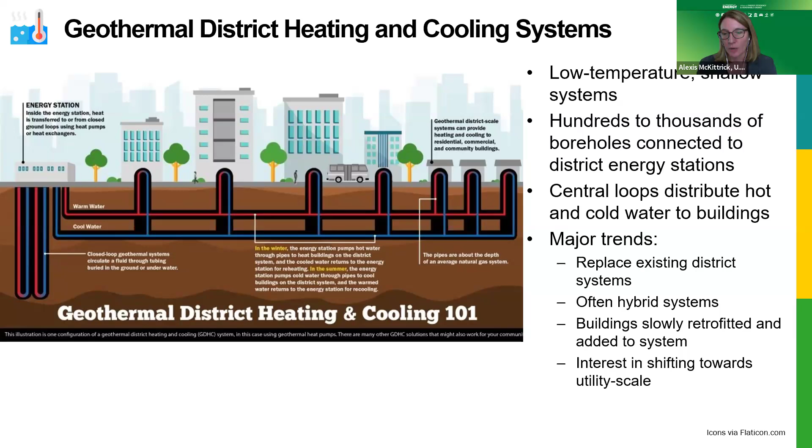Also, the previous graphic I showed was one loop that provided both heating and cooling. This system is what's called a 4G system, where essentially you have separate loops that are networked for both heating and cooling - basically a hot loop and a cold loop. That is, again, just another configuration of the way these can be made to work for whatever your situation is. I also wanted to mention quickly that there are a number of systems in the US that use a technology like this for heating only.

It's called direct use geothermal. It's usually less geothermal heat pump based and more about drilling a bit deeper and bringing really hot fluid to the surface, using heat exchange for heating. Those systems have been around for a long time.

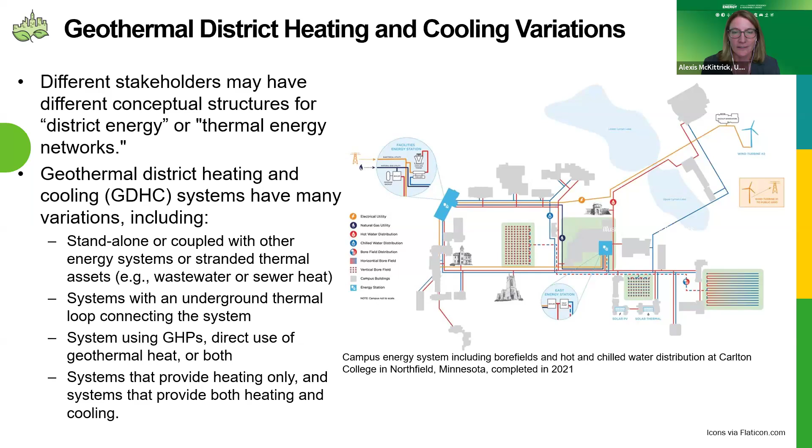One of the best examples, most commonly referenced, is the 90 building system in Boise, Idaho. If you're interested in that heating-only application, feel free to reach out to me or look up that Boise system, but I am going to concentrate on the heating and cooling space today. Next slide, please.

We would like to think at the Department of Energy that we are helping move this space forward. One of the big ways we're doing that is with our community geothermal portfolio. We had the opportunity to run a funding opportunity several years ago that served several different purposes.

We saw this emergence of community scale, district scale geothermal systems that were networked in universities. We hadn't seen as many of them move into communities, and we wanted to show through a set of innovative projects that these could work in a lot of different places in the US - in urban and suburban environments, rural and remote environments, different geologies and geographies across the US.

And that they could be used to reduce energy burden, to reduce environmental burden for communities, and really not only create a decarbonization solution for community scale heating and cooling, but also help remove burden from communities that have historically, unfortunately, disproportionately received that burden. So we are very proud of this set of projects.

Again, it's 11 different communities across 10 states, and you can see from the pins in the map kind of where those fall. They're listed here on the right.

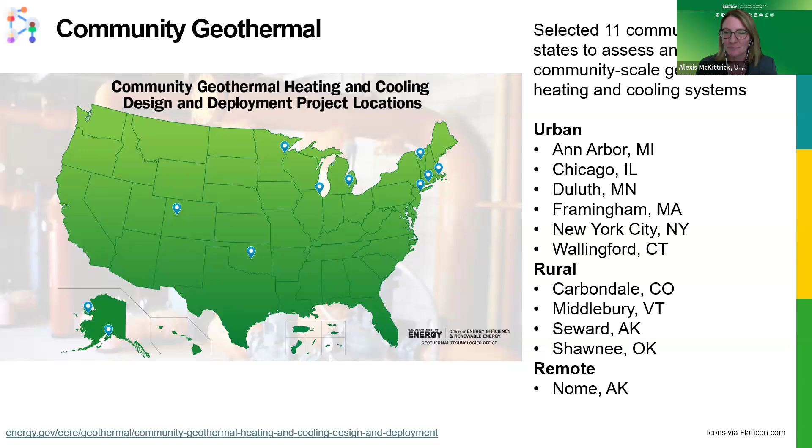I wanted to make sure to spend a couple minutes talking about some of the analytical resources we have for folks. One really important analysis that came out last December is our geothermal heat pump impacts analysis, or GHP impacts analysis. This was run out of our data modeling and analysis team at DOE's GTO, and was conducted by Oak Ridge National Lab and the National Renewable Energy Laboratory, or NREL.

Essentially it looked at what if we were able to move forward with mass deployment of geothermal heat pumps at buildings. What would happen? What would the emissions reduction be? What would the impact on the grid be? What would be the effects on building electricity use? And how would the bulk power system react if we suddenly went from the volume of geothermal heat pumps we have now to almost 70% of the building stock having geothermal heat pumps installed?

One really important note, since we are talking about networked geothermal here, is that while we do plan a moving forward analysis in the thermal energy networks and networked geothermal space, this particular analysis is just focused on individual building GHPs. So think about commercial buildings, residential buildings—if 70% of them were converted to GHPs over time, what would that look like?

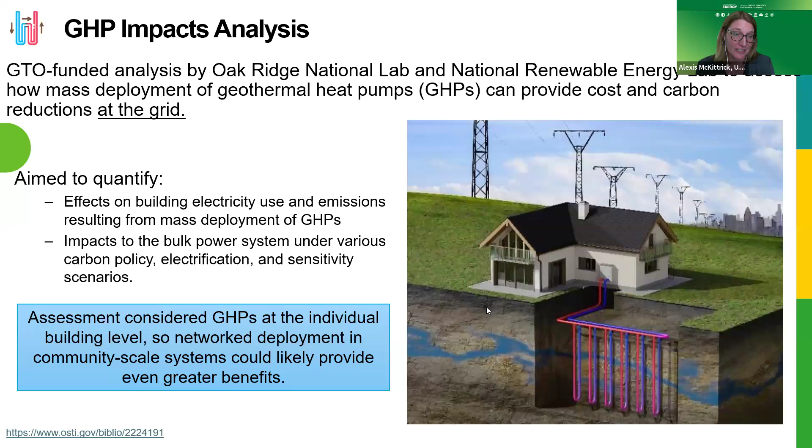And we found—next slide, please—some really exciting results. One was the absolutely phenomenal impact that converting to geothermal heat pump based heating and cooling would have on the electric grid. Everybody was expecting large GHG emission reductions, right? We have that on the bottom: 7 gigatons of carbon equivalent could be removed from US emissions. That's gigantic and phenomenal. But it wasn't necessarily surprising, because we know this is a big shift away from fossil fuel-based heating and cooling sources.

What surprised us was the grid impact in the top two bullets: eliminating the need for over 43,000 miles of new transmission infrastructure. For those familiar with the SunZia transmission project, which I imagine a lot of folks on this call are, it's equivalent to 44 SunZia transmission projects that essentially would not be needed in the future, simply because we are lowering that total demand on the grid and lowering the peak requirements for the grid with this technology. It would also reduce over 400 gigawatts of nationwide generation capacity that would be needed.

So as we are thinking about electrifying America and how we can build out the grid to better support that, employing this technology and GHPs would actually reduce the total amount we would need to build out for that grid. Really exciting results there. And that's not all—scoot over to the next slide.

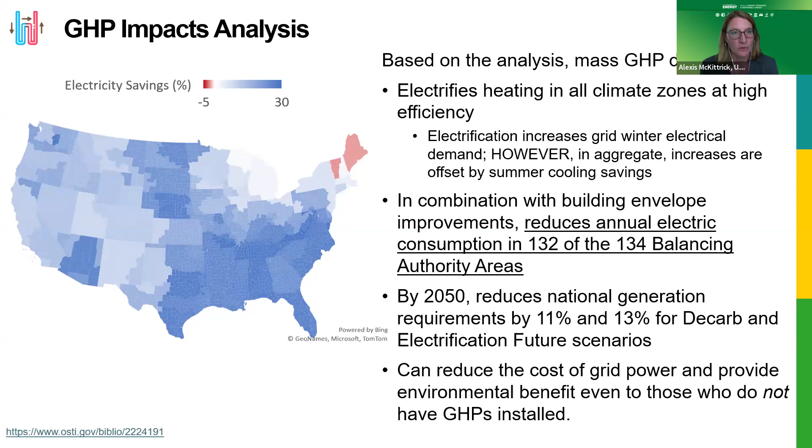That's the future, right? That is what we could do if we made better use of these technologies. I'd say that these networked geothermal systems are just the next step. This GHP technology is something we have today, installed in US homes now, commercially available. Thermal energy networks and networked geothermal are the next evolution, where we're taking these types of systems and networking them together for better and more beneficial use across consumers.

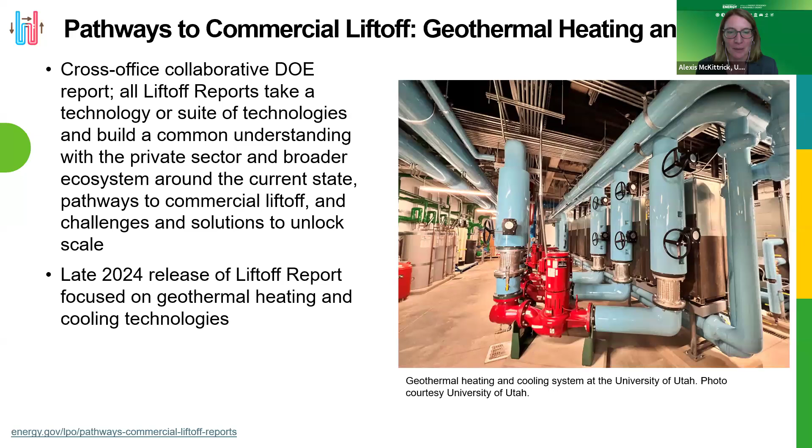And if we go to— sorry to interrupt you. No, we're just trying to stay on schedule, so as quick as you can with the last slide. Sure, I will go ahead and wrap up. Sorry to interrupt. No worries at all.

This is just more of a reference slide for folks. Geothermal heat pumps have some first of a kind tax credits right now. We encourage you all to check out the amazing fact sheets we have on our website, especially the commercial GHP credits.

I also wanted to call attention to the fact that we have a number of states developing legislation in this networked geothermal or thermal energy network space, and the Building Decarbonization Coalition has probably the best summary of that. This is part of why we're hearing and seeing so much interest in network geothermal—a lot of folks focused on decarbonization, and some states looking at this saying, hey, we want to see geothermal pilots and understand what that looks like. So again, just a couple of resources for folks.

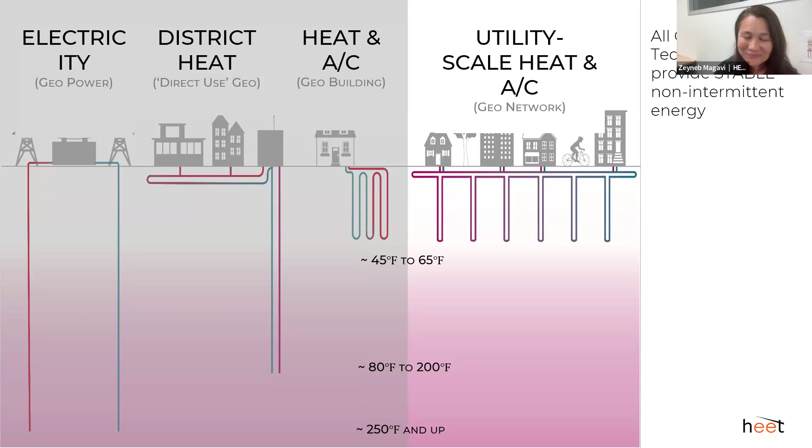And I apologize for so much language, but I really wanted to give you a sense, because whichever state you're in, you probably have more than one name for this. And the best way to tackle understanding what the proposal or infrastructure is that you're talking about is to divide it into three parts. This is also critical to understanding costs going forward. First, we have the buildings. In the buildings, we have the ground source heat pump, the geothermal heat pump — that's the same thing, and it's a technology that's been around for 50 years. A lot of what we have here, all the components, are old tech. Then we have the infrastructure or distribution infrastructure that connects the buildings together, and that is again old tech. We're talking pipes and pumps — this is even the same pipes as we currently put in the ground in our gas network.

And that's sometimes referred to as an ambient temperature loop, thermal highway — there are a lot of names out there, I'm just warning you. But it's maybe most commonly at the moment referred to as a thermal energy network. And the last part, really critical, is that thermal resources category. This is really thinking of it as our sources, our sinks, and our storage all at once, which is where it gets a little interesting and a little complex. And that's part of why it's delivering such crazy impacts, as Alexis described.

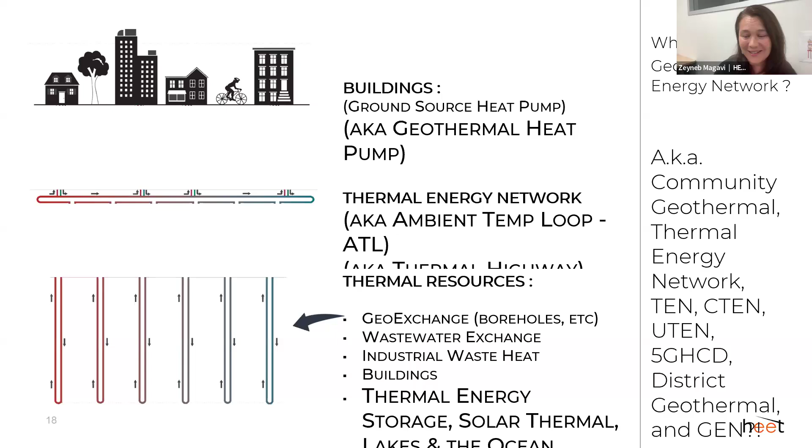So the list on the right is overwhelming. It's all of the currently in use terms across the country, including — you'll see 5G HCD, which is a classic terminology from Europe for fifth generation heating and cooling district. Again, every one of these is almost the same thing. Don't worry.

So what matters is what you're getting from the infrastructure. These are actually the requirements that HEET set out to meet in 2016, 2017. A lot of people thought they were a little out there, ridiculous. How could one technology meet all of these?

So I'm going to briefly go over the benefits of geothermal networks and how we have a shot at all of these listed. First of all, high safety and security. Look, I've worked a lot with the gas system. Safety matters, and this infrastructure is incredibly safe. It is not explosive, and furthermore, there's a security and an energy security to having local energy and having it all underground.

That leads also to reliability and resilience. There are some amazing cases. One of the only neighborhoods in a portion of Texas that did not go down in Superstorm Uri was the geothermal network in Whisper Valley. The only electric company in Oklahoma that did not have to bill their customers after Superstorm Uri was the electric co-op who had 2,000 geothermal heat pumps. There's a lot of cases of how reliable and resilient this infrastructure can be.

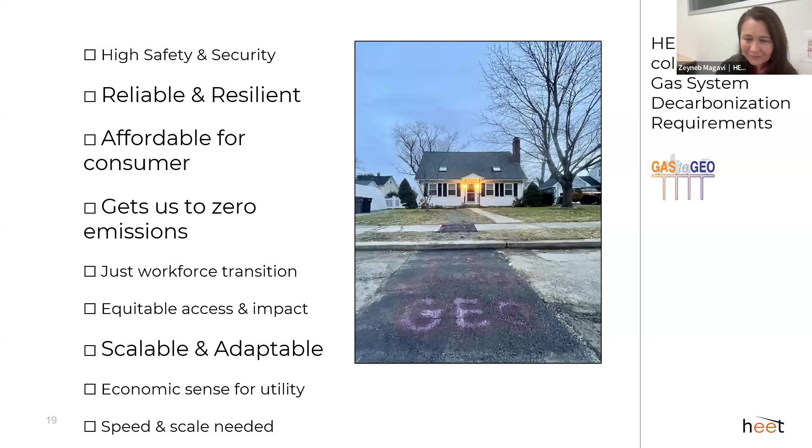I probably need to speed up. So very quickly, just to give you some touch points - the geothermal heat pump is the lowest cost of energy today. That is not something we're saying is going to happen in the future, it is. And similarly, the cost of energy monthly and the O&M costs are the lowest for network geothermal.

The cost question that we have to tackle as we consider scaling this technology is the question of paying and amortizing the upfront infrastructure cost of the boreholes and the network. We're attempting to approach that in the standard way, similar to a gas utility.

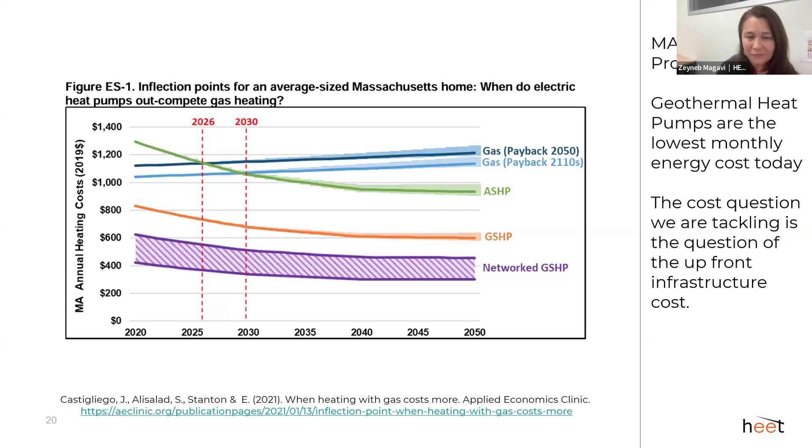There really is a critical piece to this when we think about areas that do have gas infrastructure that also have climate mandates - a building by building transition off of gas infrastructure. We know the story, it could really end up creating a high burden on remaining customers. This is a lovely graph from a study in Massachusetts, really showing that if we create a merged ratepayer base, we can stabilize that transition, not just keeping costs low for all customers, but also, I would add, keeping and maintaining a workforce to ensure safety on the gas system.

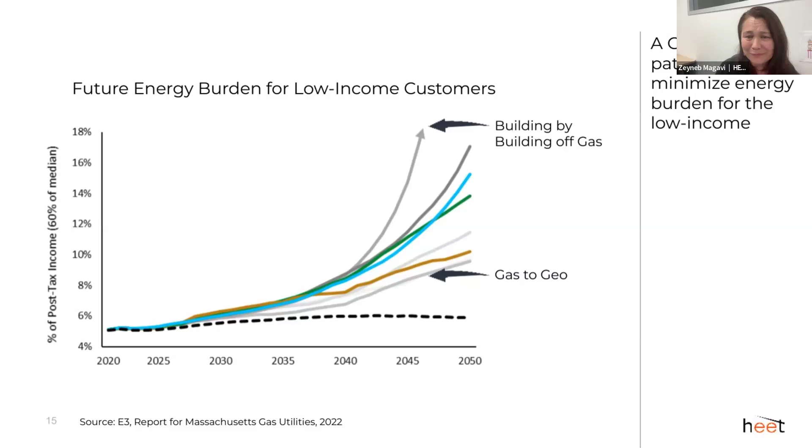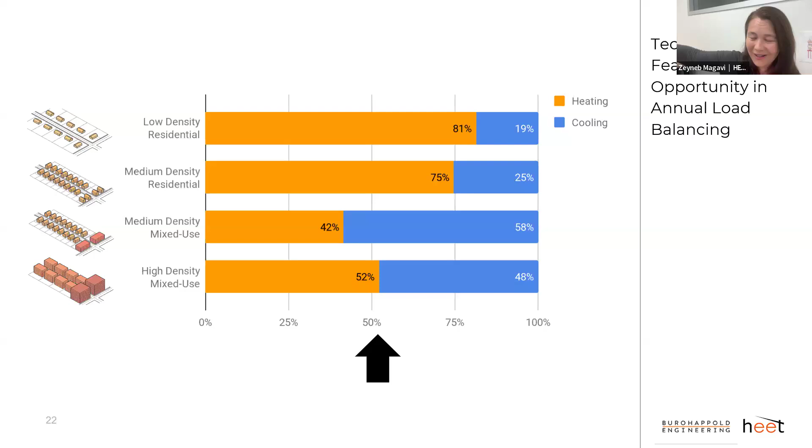Just to aim again, this is a study by HEET, a feasibility study for Massachusetts, where we looked at different types of street segments. This is an everywhere technology for anything above a low density residential. Rural miles between houses doesn't make sense, but it really has some cost advantages in a high density mixed use setting, which is typically one of the hardest areas to decarbonize. And that's pretty exciting.

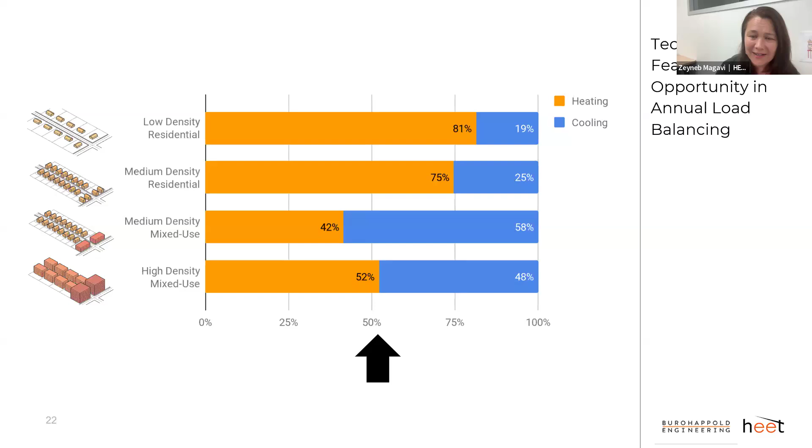And this is one of my favorite slides. It's really just a different way to look at the same amazing results that Alexis shared, that there is a really strong connection between the choice of building decarbonization technology and the impact on the electric grid. You probably all know about the duck curve. Well, now you're in the know about the falcon curve. It's scarier than the duck. This is a seasonal, January to January, view of all building electric use for different efficiency technologies. And when we raise that efficiency, we get all those wonderful benefits that Alexis talked about. It's critical that we somehow connect these cost impacts to get the least cost path forward, which means we're going to have to think about how to monetize the benefit of geothermal on the electric grid.

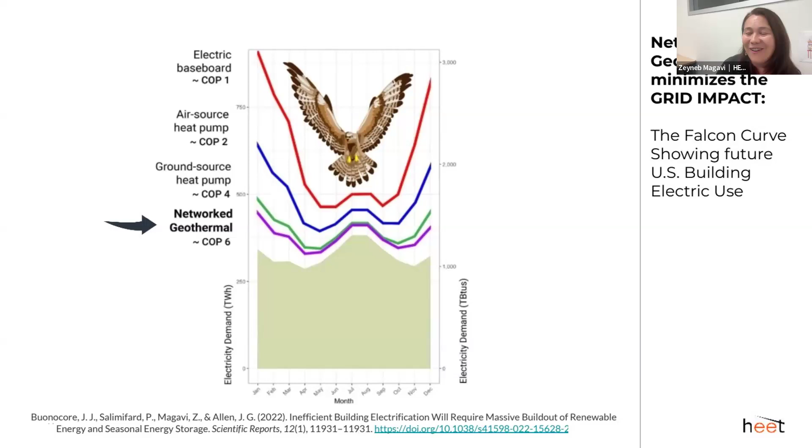And then we also got our first efficiency numbers out of this project. That's a 570% system efficiency annual, with a winter peak efficiency of 890%. Just to give you a sense, your gas boiler, even a really good one, is sometimes approaching 97, 98%. So if you think about the difference, that is not just energy, it's cost, it's a lot of things. That's pretty exciting. Next slide.

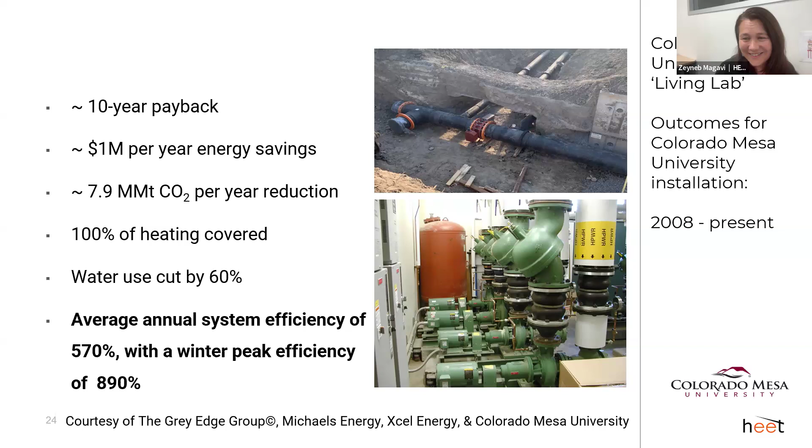So this is just the benefits list checked off. We have a really good shot at everything plus, and that, I think, is why we're having unusual partnerships come together. This is just an example in Massachusetts, where I'm from, of the unusual partnership between climate advocates and gas utility. You're going to hear from me and then from Eric. We're working together closely, Eversource and HEET. And I think that's not a one-off. It's happening across the country.

Next slide. And I want to give you a sense of that. HEET's working on networking people together, I mentioned. This is part of the outcome, not just of that crazy set of benefits and the education and the excitement. More than 6 states have permissioned gas utilities to sell thermal energy using this technology. And some of them have even addressed, for example in Washington state, evolving the obligation to serve to include this technology. In Maryland, the Warmth Act directs them to contribute data to a universal database. There's great stuff happening. It's very exciting.

Next slide. And there's an advocacy coalition of similar states working to educate and support rational legislation and regulation. Next slide. And even more exciting is that there's just a rapidly growing list of gas utilities who are meeting regularly in the Utility Networked Geothermal Collaborative to consider and evaluate this potential path forward. And that is amazing, because that is a testament to the potential scaling of this technology.

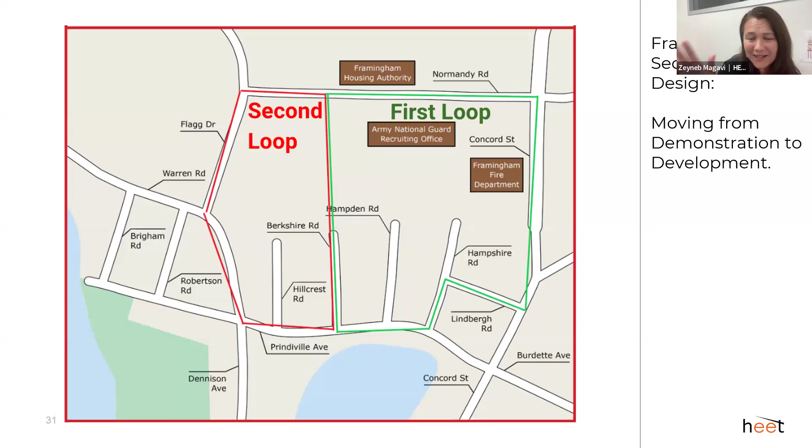And we just need to wrap up. Absolutely. We're done. Get next slide. Apologies.

Yes, so I will just say that it's been a privilege to come together, and we are convening some regulators in early October to share information, hopefully in a shorter way. Feel free to reach out to info@heet.org to join us.

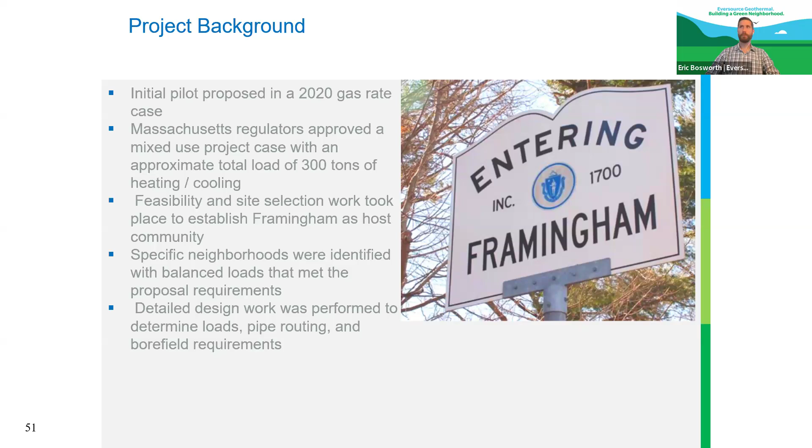Next slide, please. This slide shows you an overview of what that system actually looks like. It is approximately 1 mile of 8-inch HDPE main running in a single pipe loop through a neighborhood in Framingham, Massachusetts. We've got about 140 individual customers on, and that's really a great cross-section of all our typical utility customers. We have single-family homes, low-income Framingham Housing Authority apartments, some larger commercial with parts of a Framingham public school building, a fire station, a cabinet shop, some small local businesses, a Gulf gas station, for example. What it really does is provide us with great insights into what that transition looks like for different types of customers, whether they're coming from gas service, oil service, or electric resistance service in some cases, and how a networked geothermal system will perform for them, and what the increase in efficiency and reduction in emissions could be for each of these different customer types.

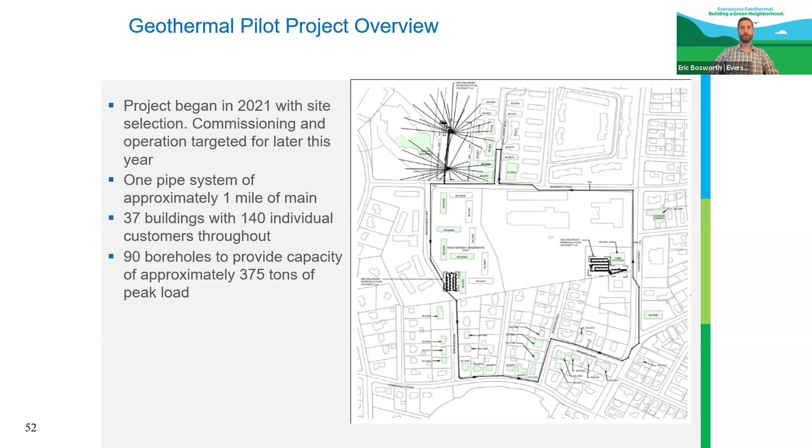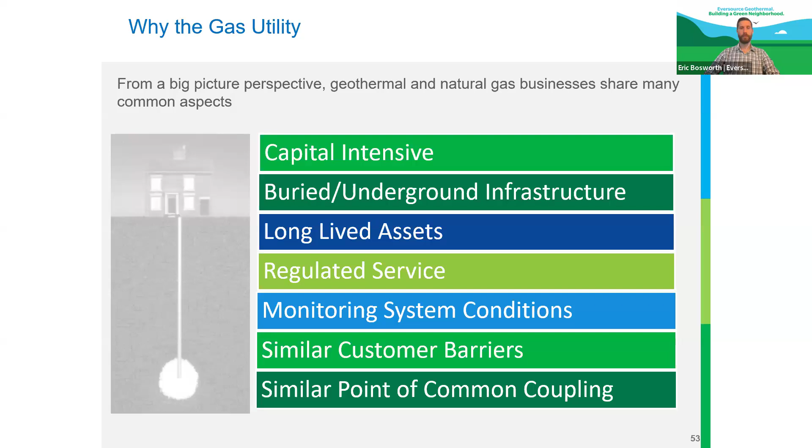Next slide, please. So why is this project being undertaken by a gas utility if, ultimately at the end of the day, it is electrification? There were a number of reasons we felt this fit pretty snugly within the typical gas utility business. Networked geothermal systems are inherently capital intensive. There's costs up front to do the drilling, put the pipes in the street. The maintenance and operations of the system is very similar to a water, gas, or electric utility type system. They're long-lived assets - these boreholes will last potentially 50, 60, 100 years in the ground. And it very well fits into that regulated utility service style model. Finally, from a customer perspective, it's also providing energy to the community, and the customers really want someone like the utility that they trust to be delivering heating and cooling 24/7, 365, and they know we're going to be there if there are ever any issues on the system.

Next slide, please. Looking more at those gas work similarities, the installation of these systems is very, very similar to traditional gas work as well. This picture shows you a fusion setup for geothermal pipe that was actually put in Framingham. If you didn't know that was geothermal pipe, anybody familiar with gas or water utility installation could mistake it for that. It's the exact same resins that we use with gas pipe installations, exact same fusion techniques. We're in the street trenching, installing these pipes. We're even using similar systems like our GIS, our markout systems, looking at something like a SCADA to control and monitor it. All of it fits very, very familiarly into what we would typically do day to day in the gas business. Next slide, please.

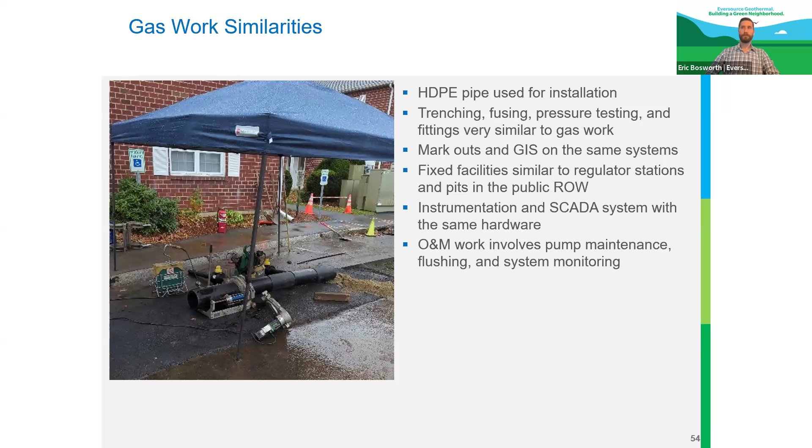So looking at each of the components of a networked geothermal system, you have your main and service installation. As I said, this is kind of utility bread and butter, this is what we do every day. These are some pictures of the geothermal pipe we put in Framingham, as well as a service that was pulled to one of the customers on the loop. All of this work was completed as of last November, the entire distribution loop was in. And honestly, that was the part of the project most familiar to us. It went very smoothly, on time, and pretty much as expected.

Last point here, we did bury it a little bit deeper than traditional gas service. We were at about 5 feet underneath the roadway, but otherwise almost identical to a gas pipe installation project.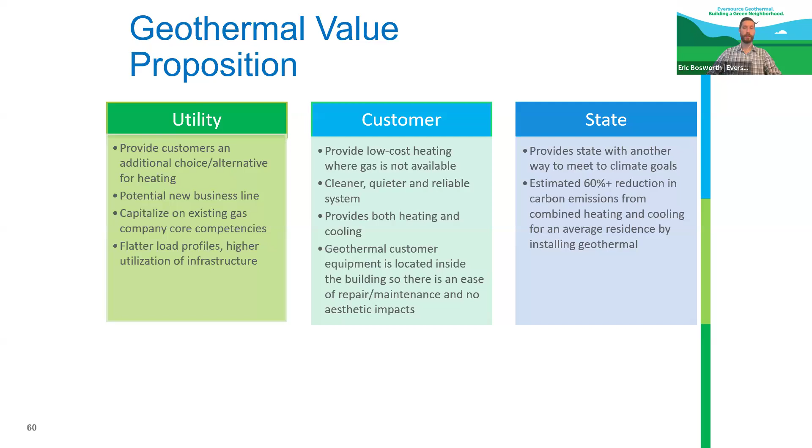Finally, I just wanted to leave folks with what success looks like in the case of this pilot, and really the questions we're trying to answer by implementing it.

Obviously, there's the technical factors around performance, energy usage and cost, but I also wanted to highlight there's a customer acceptance question we're trying to prove out here as well - how they like the systems, how comfortable they are, if they'd be willing to recommend it to family, friends, neighbors. We want a really holistic approach to all the benefits of a system like this, not just the numbers around cost and energy usage. So I'll leave it at that.

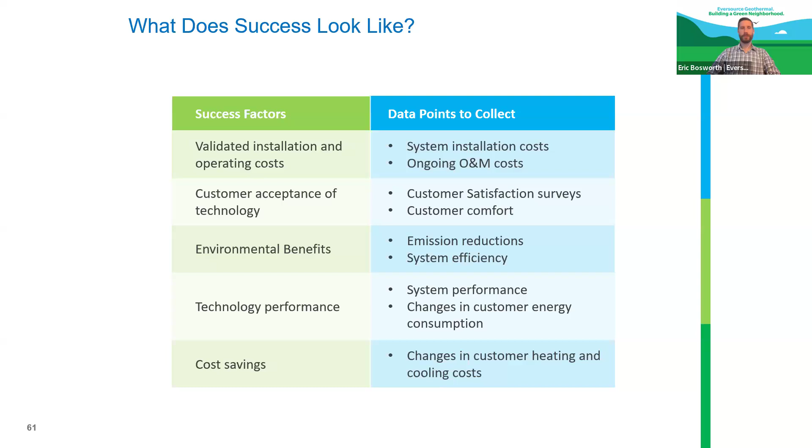If you want to hop to the next slide, I think it's just Q&A, and hopefully there are some questions we can field for you.

Thank you so much, I really appreciate you sharing with us. If I can have the other panelists tick on as well, we'll do a somewhat brief Q&A. You all have been doing a great job answering on the fly. I'd offer our participants to take a look at all the great questions and answers already posed. Dr. McKittrick, I want to start with you, and these will be somewhat rapid fire since we're zeroing in on the end of the hour.

You pointed out the potential savings on the electric infrastructure were some of the most eye-popping results to you - almost 44,000 miles of new transmission avoided, 410 gigawatts of generation. Those are pretty shocking values. I wonder, to put a finer point for our audience, what is causing that - you'd think electrifying heat means you need more, not less. Is that really just the gains from cooling efficiency, given that the majority of the country still peaks on cooling load?

Yeah, I definitely understand that viewpoint. I'd make it a little broader and say it's the overall efficiency of these systems, the very high coefficients of performance they get, especially in buildings that have been retrofitted to address their building envelope and other efficiency measures. So yes, overall efficiency for both heating and cooling. The only reason I don't want to concentrate on cooling is because we get a lot of questions about whether these systems can work in really cold climates. The short answer is yes, they can.